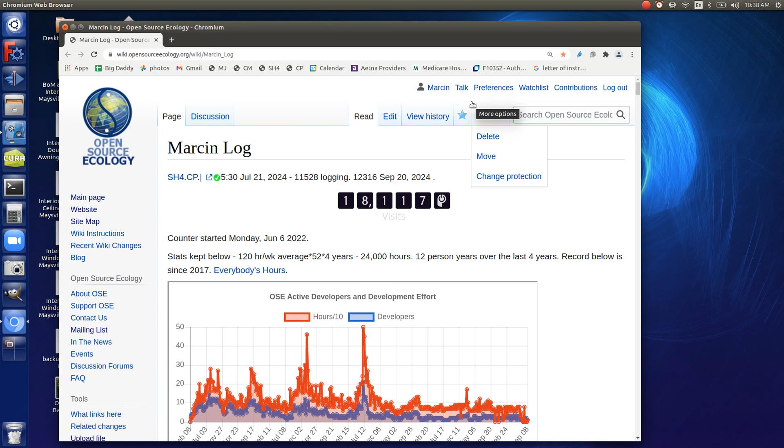That's my mission: to deliver an ability for humans to collaborate on scales unseen before. That's the basic goal, and here, that's a prelude to this.

Would you guys like to take out a computer and take notes in the same document I'm on, or forget it because we're too stressed for time? Okay, but that's definitely what we'll be doing in the future—maybe in future builder crash courses, we'll formalize that.

For example, we could set up a classroom space with desktops already booted up to the page, making it super easy for you to edit—like having an app in front of you. That would make all of this much easier. Right now it takes too much know-how, too much for now.

Let's boot up and review what we did yesterday—basically the numbered, regrouped version of the latest one we have in FreeCAD, just to see what we've gone through.

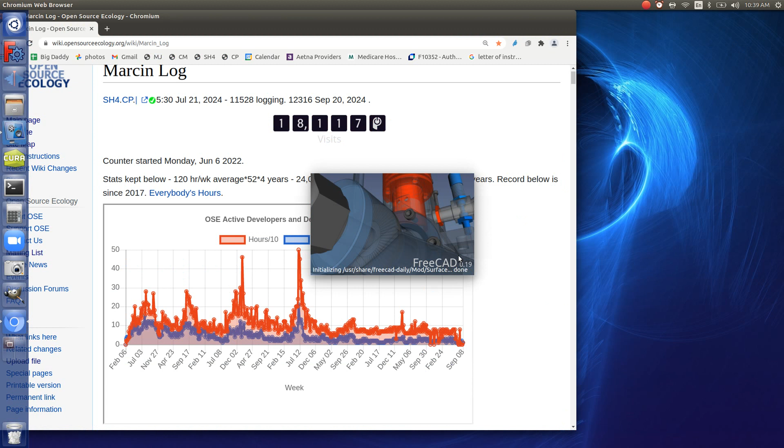The major thing we discovered yesterday was some bowing of the foundation. In retrospect, it's like, duh—one of those don't-be-stupid-101 things.

The 2x8s we're using had posts every 10 to 12 feet between sections, but the span of a 2x8 is about 10 feet, so it's definitely going to sag on you.

Right now, what I did was—I'll show you a picture of what happened, what we did, and what the result was. So in the photos, look at this thing here.

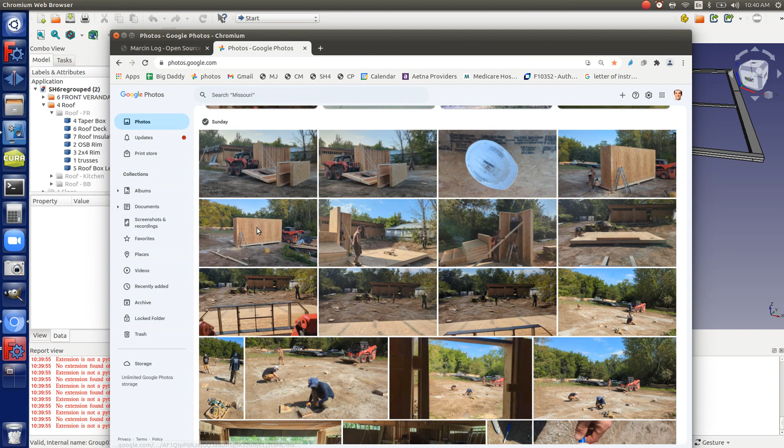Hey, the photos didn't update. Let me see if they can come up in real time. Sometimes Google Photos updates readily, but right now they haven't—as we speak, they should get updated.

What we did here is support it every 10 feet. That's good, because the span in the joist direction is a 10-foot span—actually 10 feet 6 inches. For the 20 feet, that's just right.

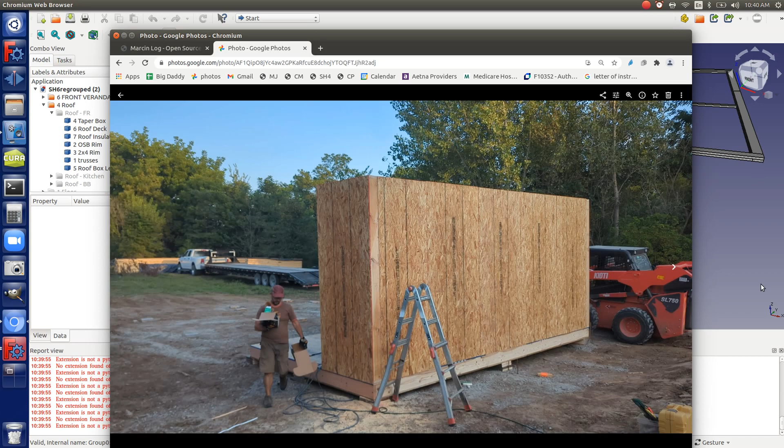So that wall came out good, but we noticed major upheaval when we got to the second wall with the sag. In this wall, as you see the detail right there, we already have that—that's why these walls worked, and nobody picked it up, including me. So these walls were relatively benign to do.

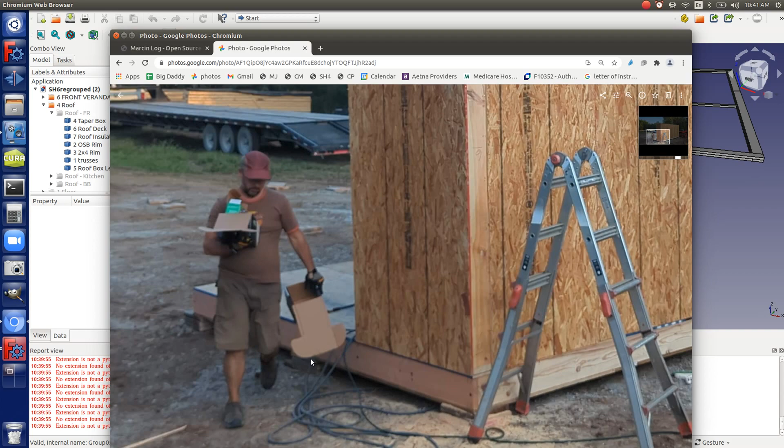But then what happened—let's refresh here. Then, look at this. Man, so this is actually after correction, and what's happening—this thing is in midair.

What happened is we already attached it to the next one, and it was attached on a foundation that was sagging. So it's crazy how it worked out.

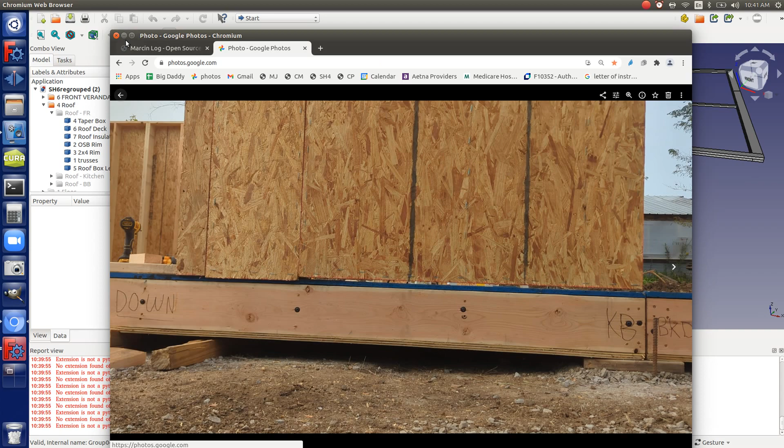Let's actually describe that process. Right here, we're going at it—no support in this 12-foot section, so you have to put a support in the middle. When we were doing this, things started to go awry.

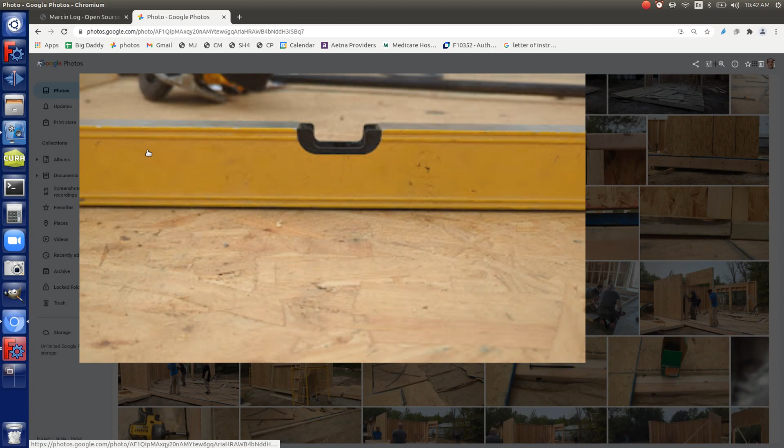Suzanne noticed this when she measured with a long level. This is pretty much after correction—that's not really a space, that's a pretty tight, good gap.

But before that—this is after the correction, I don't have a picture before the correction. But what happened—so we do this. This is how that was the solution.

Cut yourself tapers, like lengthwise, grain-wise—not across the grain, but grain-wise.

Cut yourself some slivers, tapers that were like 2 or 3 inches on one side, tapering down to 1 inch or so less on the other. Whack them in with a hammer, and that's called a wedge. That's leverage, you're creating motion. You're sticking it in over 12 inches to raise it 1 inch, so it's a 12-to-1 advantage with a heavy hammer. That actually is enough to lift it up.

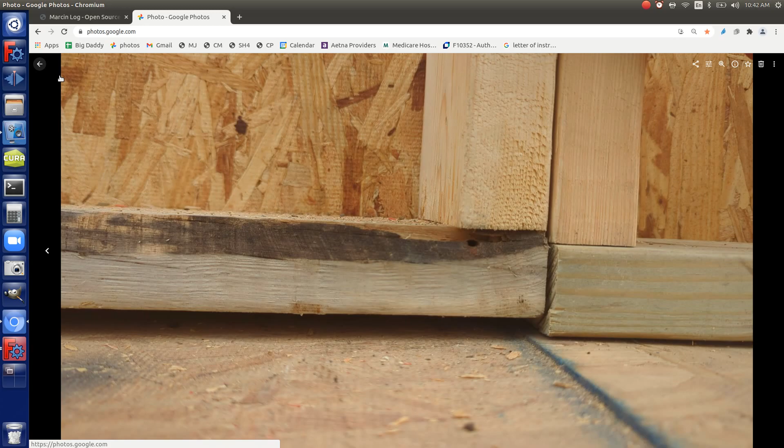So it did lift it up, and those were before some of the before shots, and then afterwards, that's after it got lifted. It turned out we actually screwed those in when the thing was in midair, when it was not altogether.

But after fixing that, before and after. So bam, that's important. We gotta make sure we support them in the middle, and we have to do that for the next section as well, so make sure before we start that we straighten this out.

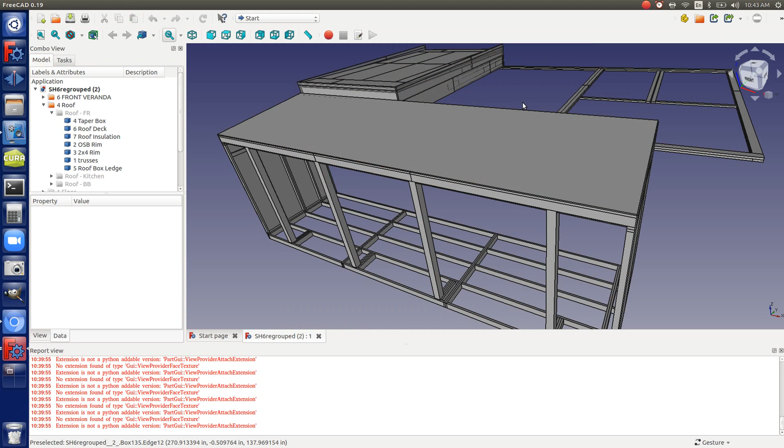Back to the CAD, hide the veranda. So this is once again, you go and we're using all the tools that we can. Yes, there is that, I mean this is what we have when we build this thing.

Yeah, I mean this is pretty much an individual unit, the thing that actually puts it together. So if you look on the other side, because that's a complete break in a house, you gotta make sure you button up the top.

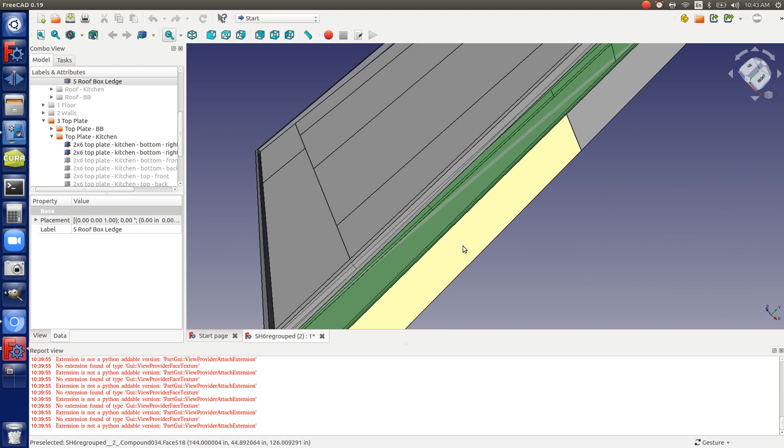So what are you doing? Into the top plate. So this is what we're going to get on, as soon as the second top plate is on, we're going to start doing the trusses.

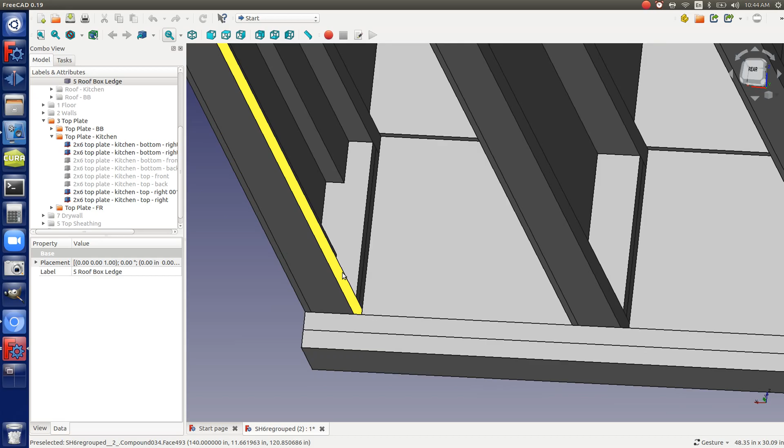So maybe orthographic view, orthographic is easier to handle. So what we'll do is make sure we get solid nails into this 2x4 here, into the top, and then actually all the tops of the trusses.

Are fixed, bonded together with the OSB on top, so that if you screw in, so the edge joists.

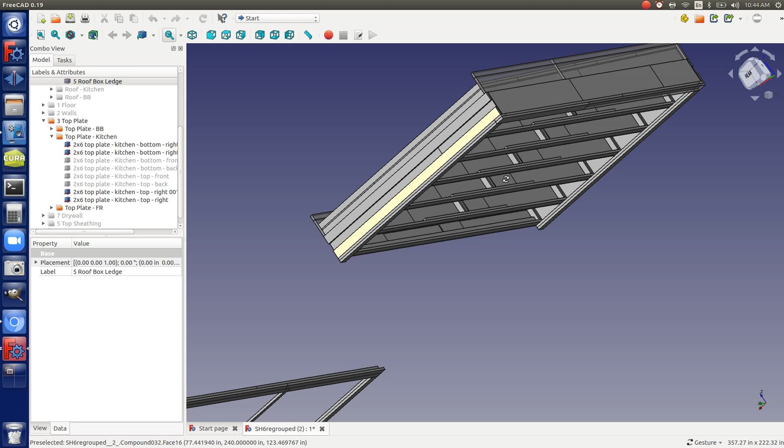These ones, they have two 2x4s reinforced, so you're screwing in through two 2x4s to each other over a structure that's pulling as one. So you've got that force of 1.5 inches of wood plus the OSB, and then another, so you got 4 inches.

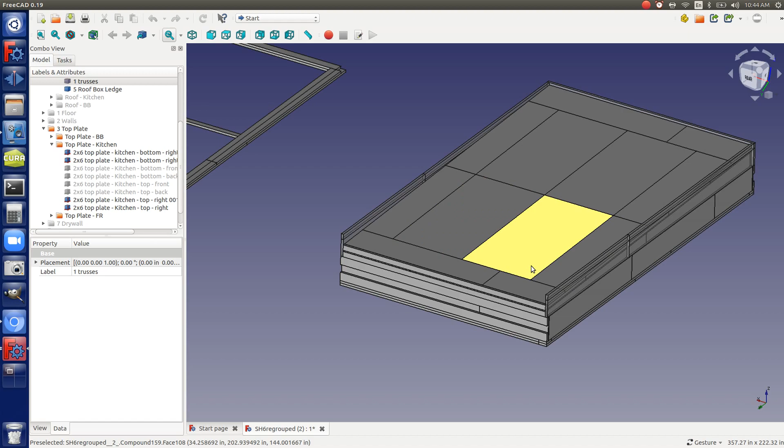You're making a connection to bond the top together, so you close up any of the gaps, like that gap here. Once we do the two trusses together, if there's any gap, we should close it up, because the wood is still flexible.

Now those modules on top, there is a little bit of a gap in there. If you look in there, taking some pictures.

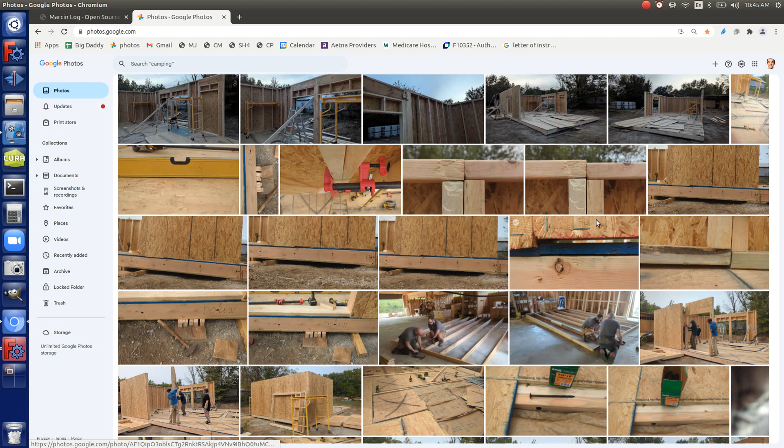Well, right between, this was actually interesting here, because at the very, very top you've got this big header. You're connecting it against that. There's like nothing to screw into there, because this one had a double, so it was kind of hard to bond it together. Let's see, do we have any pictures from the other side?

I guess that's a good example where that top plate comes in on helping join those together, no? Because we can only get so many in there, huh? Yeah, the top plate would be useful, but now we're going to kind of rely more on the trusses now.

There's also more layers that bond it together, and the steel, which is very thin steel. It's called like, what is it, like 20 gauge or something. But steel over a whole length still bonds it together so it can't slide apart, and it's a little more reinforced.

Where's the steel at? So the outside cladding of the entire house is barn metal. Oh okay, and we also use that for the front of the veranda. There was the soft membrane on top of the roof for the main part, but everywhere around we've got structure that's white with some corner trims around that.

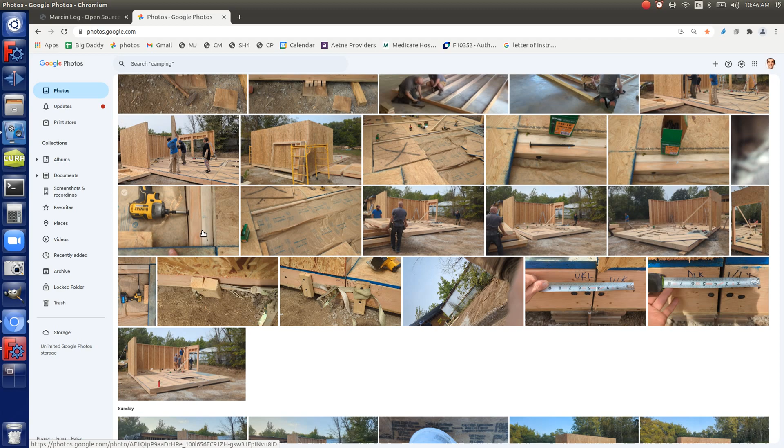Okay, so that's what we experienced in practice. So now as we go forward, just to review, let's go through the procedure again, and also for the rain purposes, we got rained on.

For rain purposes, let's get the first roof, the truss on, so that starts with, you've got the top plate like this, so let's get the double layer on. Once again.

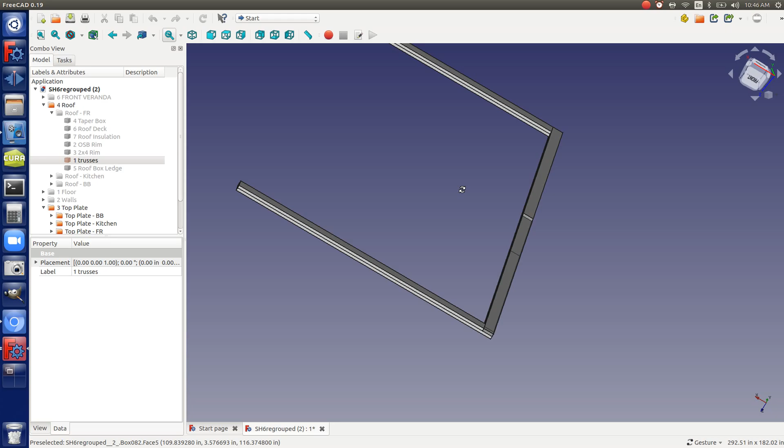What's that? How about one? Trusses, they all come up on, and how do we do them? We probably bring them in, set up two teams on scaffolding, one scaffolding and other scaffolding on each side, just bring them up, put them in place.

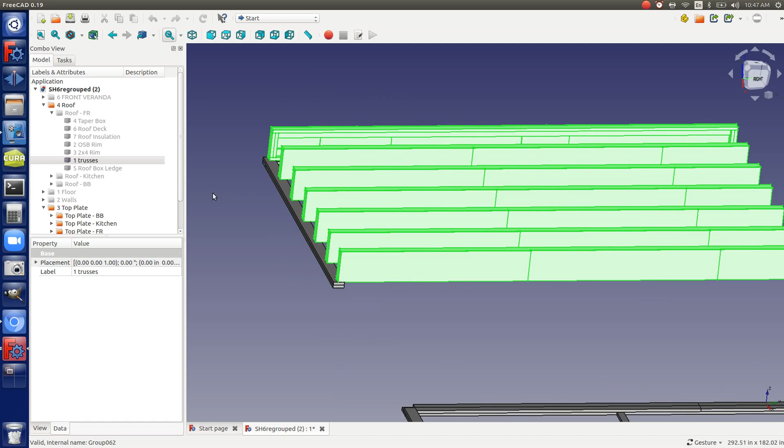And where do we line that one? Just flat against the top plate. Okay, is it? Flat against the outside, the exterior. Yep, okay, it's exactly even with the top plate. Yeah.

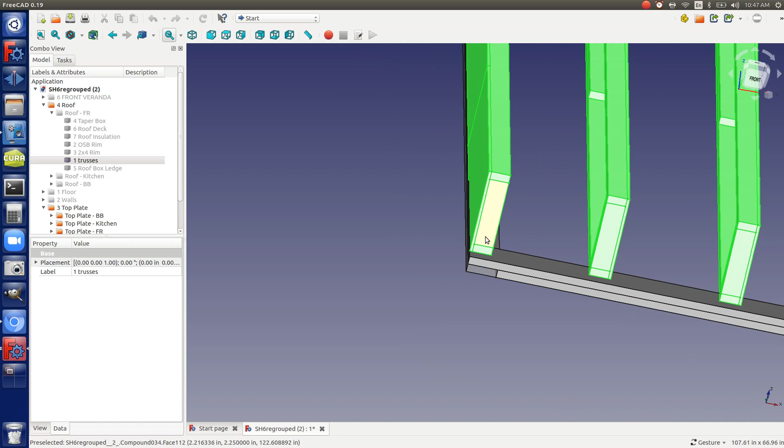Because this, yeah, remember we still have OSB that's going to bond this to the bottom of the house. Remember the top sheathing, remember that?

We still have that layer of sheathing that connects the very tops. It's right against the final trusses, but in the front we have the box. If we go further to OSB rim, there's that.

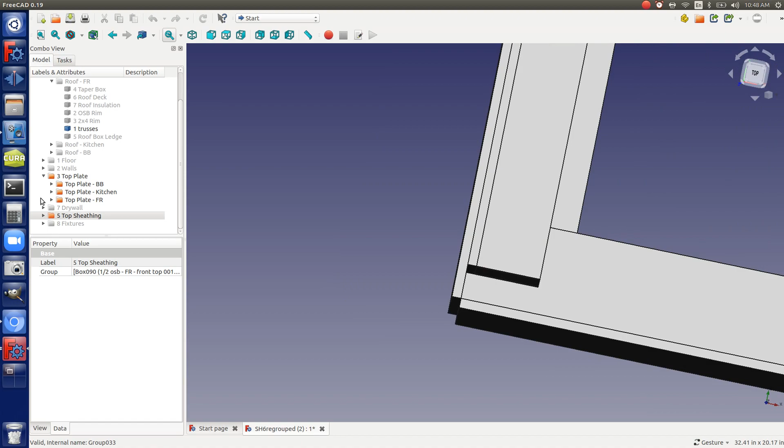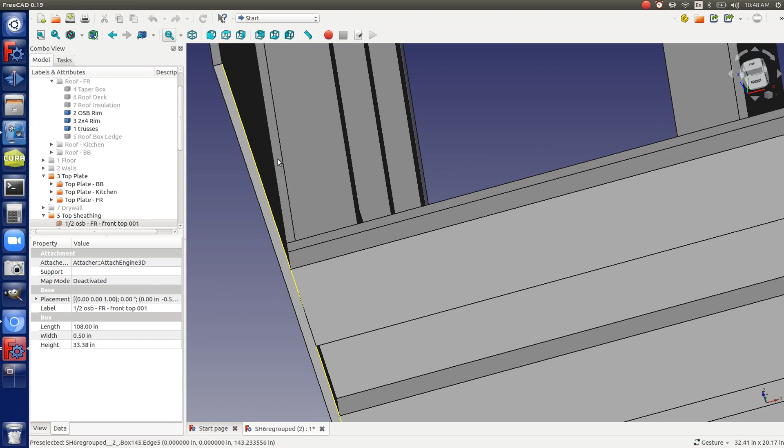3 is 2x4 rim. Those are actually 2x6s for a solid connection to the front. So after the trusses, you've got the sheathing on it and the 2x6s across the whole front and back. The side doesn't, because we've got the surface of the truss to work with, and that truss is already reinforced

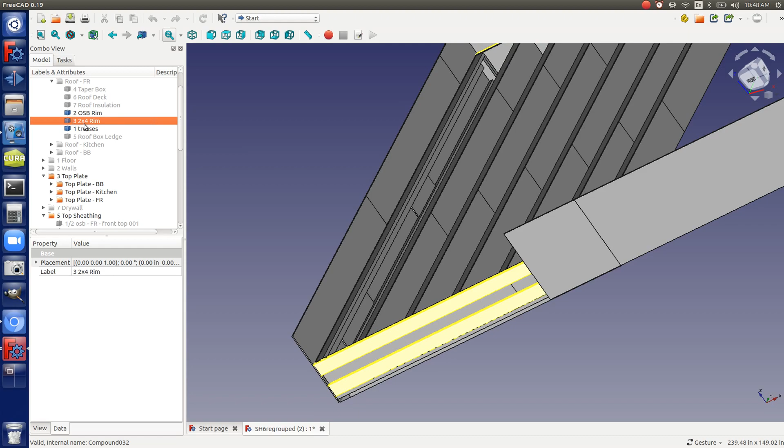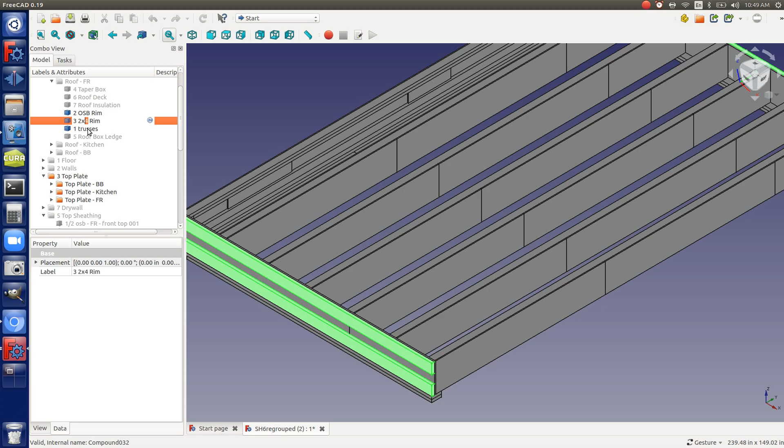with 2x4s, so we can screw into that solidly. OSB rim, 2x4 rim. Okay, let's do that again. So let's hide the sheathing. Trusses. Now let's get that in there. Right, trusses. OSB rim, front and back. You got to bond them together, otherwise they could just fall on you when you're walking up on them. So that's 1 and 3, 2x6 rim, and here I can rename that 2x6 rim. Okay, 2x6 rim. Taper box, so that's what you guys have been working on inside.

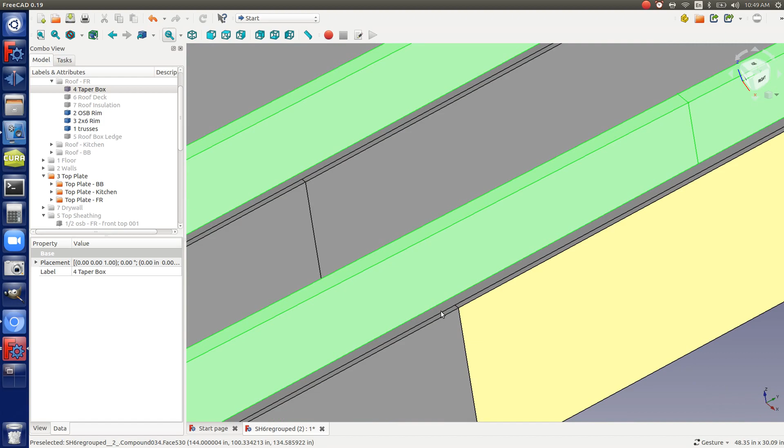Now, how do you put them together? How do you attach that? Toenail - that's pretty much what we got. You can use long screws, but we don't have so many. Just toenail it. From the front, you got to toenail it into the 2x4 right below it. Toenail everywhere, because you've got meat - you've got 2x4s underneath it, so you got plenty of space because it's in the middle of those trusses,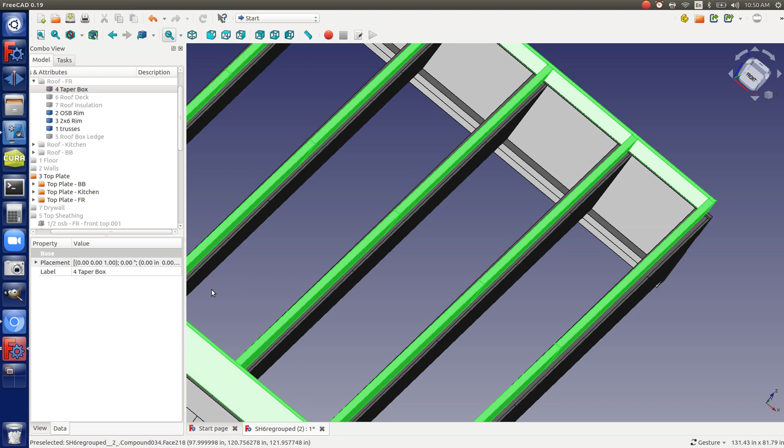so you can get a nail in there readily. How do we get the box up there? We can start it, go from the side and get it with the tractor. We can get the rim over it, and then we have to pull it up there - that would be the process. The tractor can get us quite a bit. With the forks, the top of the bucket is like 10 feet. Right now we're at about 10 feet, so you're marginally making it, and then I won't be able to deposit on top - it kind of has to bend over, and you can just,

run an operation there. We should get out 4 sets of scaffolding so that 4 people are at height. So on that small platform, the 12x20 we've got, that's decked with more scaffolding. So four teams, like 2, or 1 person, whatever, however many people we have.

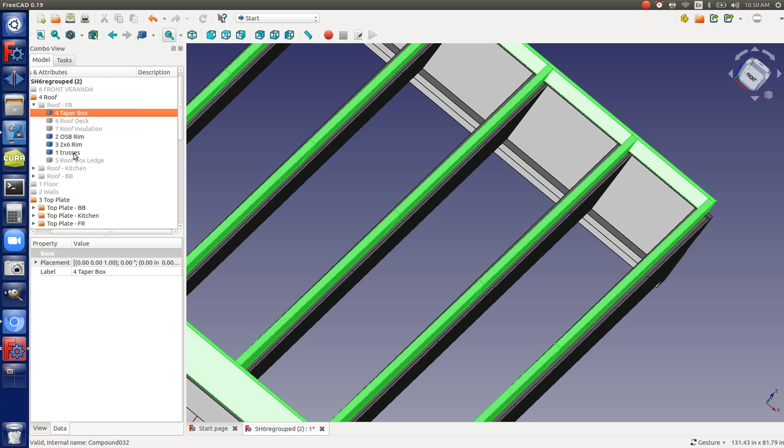Now, roof box ledge - this is the thing that's important for the purposes of water between sections. We discussed that, how we're going to drape a cover over the top. Now, okay, that's a cool question: how do you join these two together? I want to fix those.

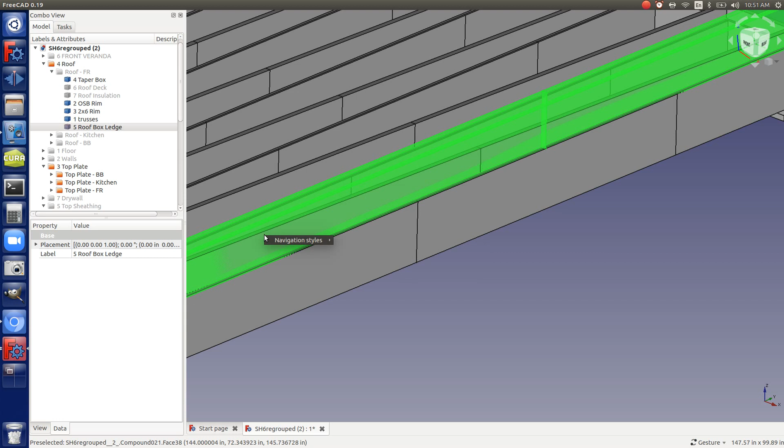View. Workbench, let's go into part design. I'm trying to do the appearance, hide the transparency.

Okay, we've got the box. How do we want to put those together? I was thinking staples - staple them together. Each staple has a 25-pound force holding on each leg. Staples are 1 inch wide, right? Why not? Why don't we do that up there?

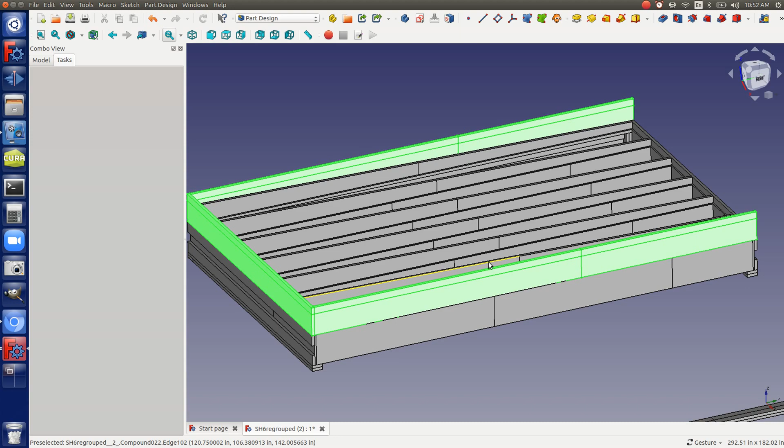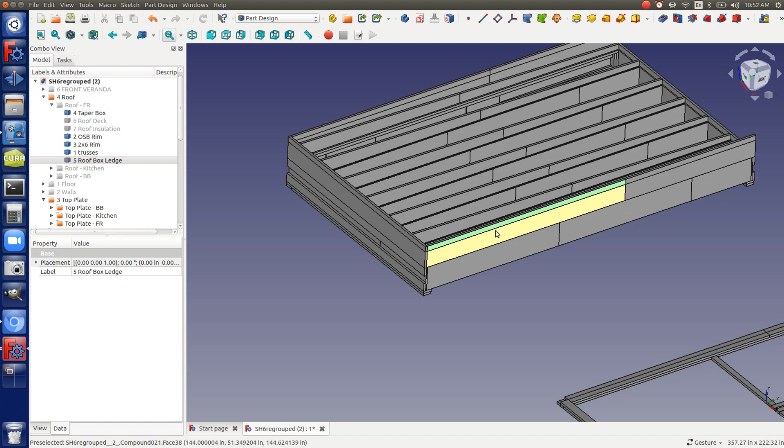So we're at the roof box - the top ones, you take it up there, take the longest 2x that you've got, then take the next one, grab a saw, just cut it off in place if you can. I wouldn't measure it and then go on - measure it, go down, mark, cut, bring it up. I would go put in a longer piece, cut it in place. You got to measure mark already, if you can do that.

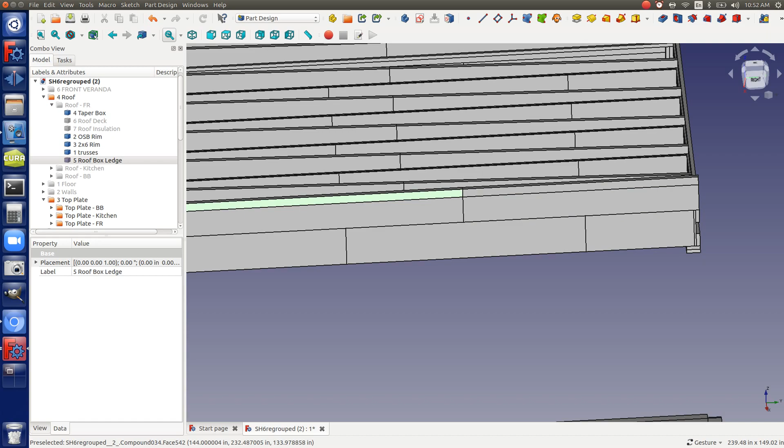That would save you time. Yeah, staples, staples - how many you need? Every 6 inches. If you've got 20 feet, the force holding each one, you can do one side and the other, right? Because it's just a 2x4 on top of a 2x12.

Over 20 feet, you got 40 of them. 40 times 25, that's 1,000 pounds of downward holding force on one side. Two sides, that would be 2,000 pounds of holding force with staples on every 6 inches, right there.

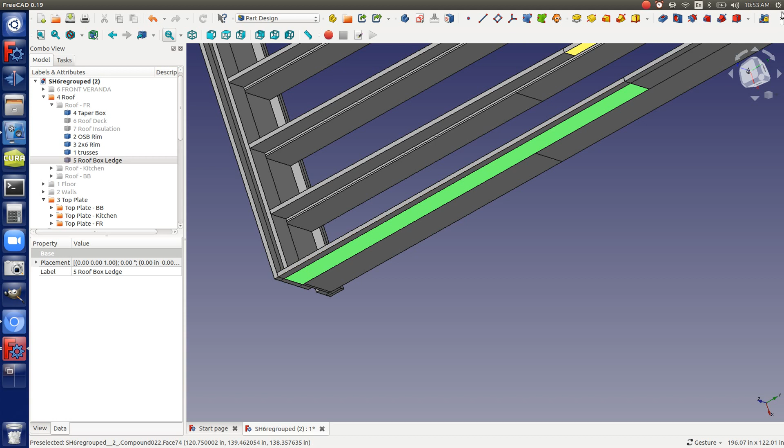I think that's the easiest way. Now we've kind of discovered staples. I've never used staples before, but they're very useful, as you see. So I think staples would be the perfect way to attach those. Otherwise, you can do screw in from the side, but you're gonna be missing because if you got vertical, it's narrow, so you're hitting it and you hardly hit the other one. You're gonna be coming out all the time. So staples could be a good tool.

Use what length? 2 inch if you can. 1.5 inch minimum. Well, no, I'm sorry, you only have 1.5 inch, so you don't want to use 2 inch. So 1.5 inch gets you the... How much penetration do we say we want? We want 1.5 for any fastener as a general rule.

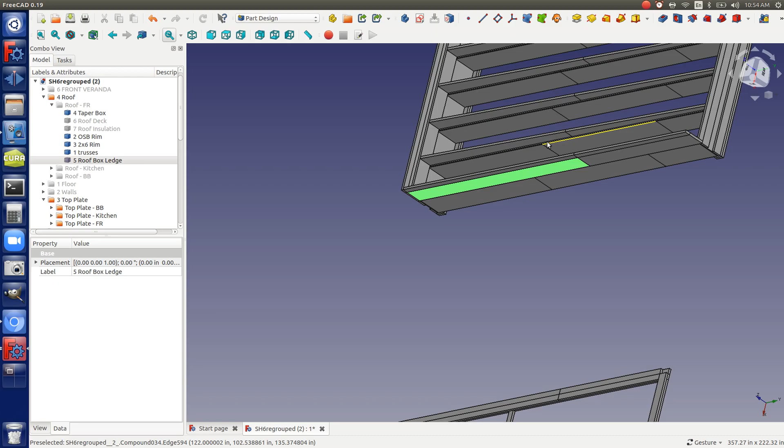Another item is about calculations. How far away from the edge do you want to put fasteners onto anything? The general rule of thumb is either twice the material or twice the fastener. So if you were to do this properly, the staple would be 1 inch from the edge. We have to have 2 inch staples. Twice the thickness of... oh, I'm sorry, I was thinking about OSB. The most strength you could get out of a connection of two 2x4s, 2x materials.

The fasteners ideally want to be 3 inches away from each other, twice the thickness of the material. If you're bonding, we do a lot of the bonding of OSBs together with another scab. Calculation question based on that basic rule: how big must the scab be in order to get a solid connection to that of the two pieces, based on this rule that the fastener should be twice the thickness of the material? What's the minimum scab that you can put on a crack between two pieces of OSB?

How thick is the OSB? Half inch. And the fasteners, well, whatever fasteners we had, let's assume we had staples of any width or screws, which you can space at any distance. Well, yeah, so you want to nail in 1 inch from the edge, right? So the absolute minimum is 2 inches for that scab. Well, you're gonna hit the edge, you're gonna miss the edge. So make it twice as big. So the absolute minimum for a scab between two pieces of OSB is 4 inches.

That's the answer, so if you're doing that just for providing the strength of the material. If there's forces on it, that's different. For example, when we're joining the trusses, which we did for the 32-foot span, you don't put a 2 inch scab between the two, you don't overlap them 2 inches. No, that's got a huge force of up to 3,200 pounds, well, 1,600 pounds on each shear thing there. So no, that does not work. I'm saying just when you make a break somewhere and there's no other forces, then you follow that rule. Otherwise, you have to...

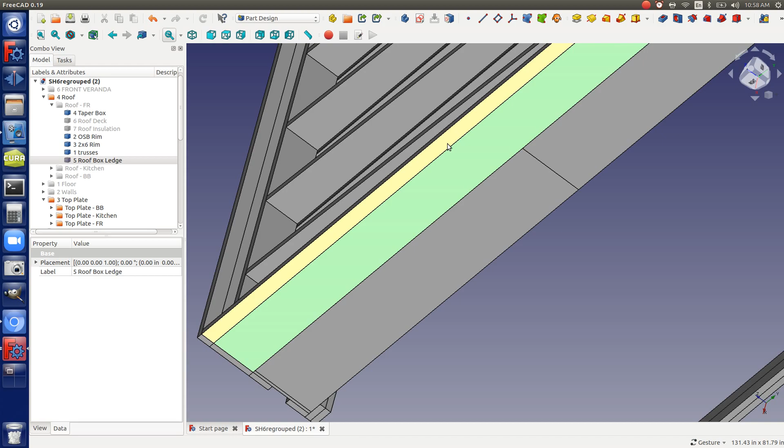It's related to calculations in that we have to get that kind of savvy to understand the details, because that helps us build faster, better, stronger, cheaper, and all that.

For example, going back to the trusses, I'll brag on myself again regarding the fact that we eliminated half of the needed trusses. If you went to an engineer, he'll make you put twice as many trusses because they did not use the design that we used. It matters. That's thousands of dollars off the cost of that structure.

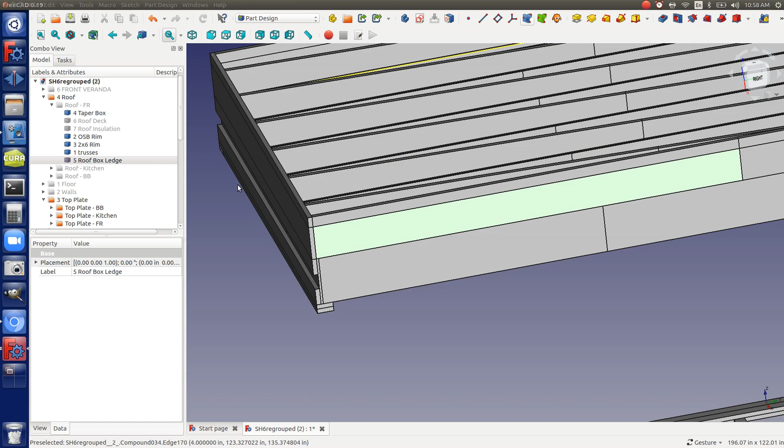So we got up to this thing. We're discussing how do you fasten it. Use staples. Roof deck, no mystery there.

Just make sure, how do you align these things? You got to make sure if you have that roof box in, you can only start at a corner like such as this or whichever, this or that corner. You will end up cutting off the last one, but the first one can go in, bam.

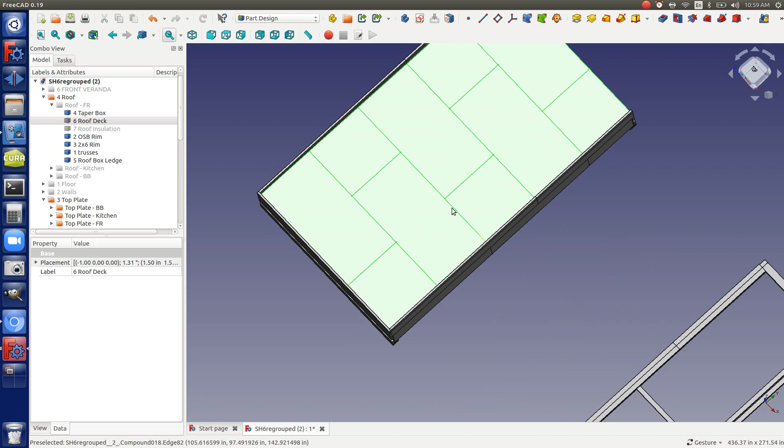Now, if it doesn't end up on a truss, or rather the taper underneath it, not the trusses, now you've got not 4 inches, now you have 1.5 inches. So that may veer off.

What happens when it does? Move it. These trusses are completely flexible right now. You'll move them 1 foot to one way or the other if you want to. When they're supported just on the edges, the middle will bend with some force, like 1 foot, and it will still hold.

I'm exaggerating, but an inch you can absolutely move that an inch or two easily in the middle. At the end, you're going to get tighter and tighter. But something like a quarter inch, if you're off, move it, it'll probably move a quarter inch. If not, how do you do it with leverage though? So you have nothing to hold on to.

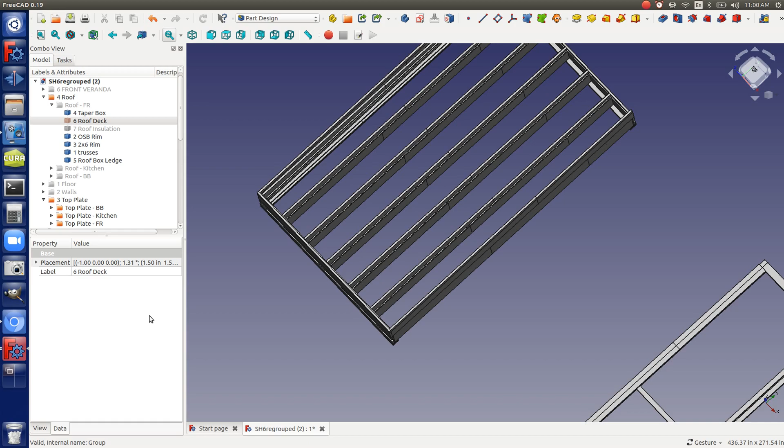So what you do is, let me show it on a diagram, because this is going to be the killer in terms of how fast and good we're going to be able to get the roof on. Let's go to the written doc that we do, just to show this clearly, so it's completely under your will where that OSB is and how you can move that OSB to fit the tapers at the end of the day.

Okay, let's go to the Builder Crash Course.

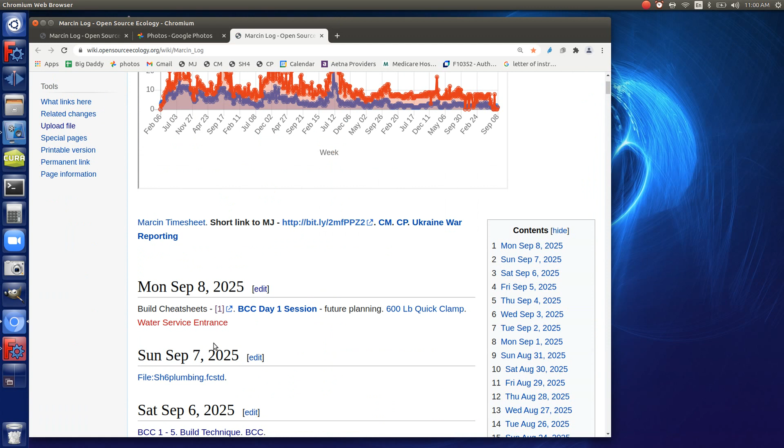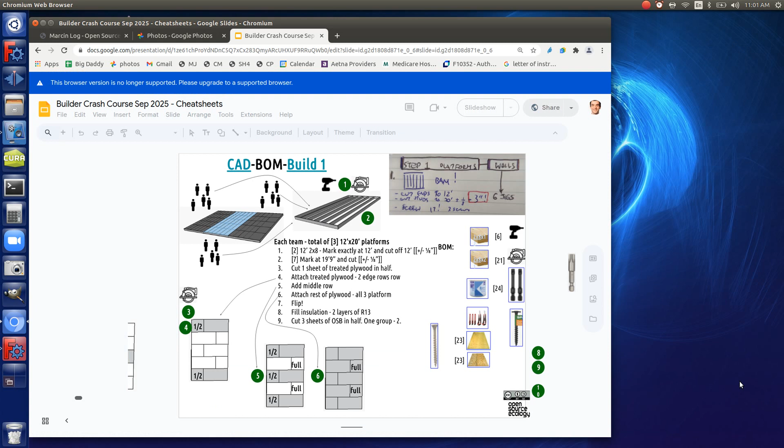We got the work doc is the thing I keep going into. No, not this, sorry. We're in under Builder Crash Course. We've got the September 25, I'm doing the history, that's the first one. But if you go to plain Builder Crash Course, that's what you get. But then I've got the September 2025, and it's under the cheat sheets here, because what we're doing now effectively are cheat sheets. We don't have full instructions, exploded part diagrams and all these assets, animations, exploded part animations, and a lot of that stuff is missing, and we generate as we go along.

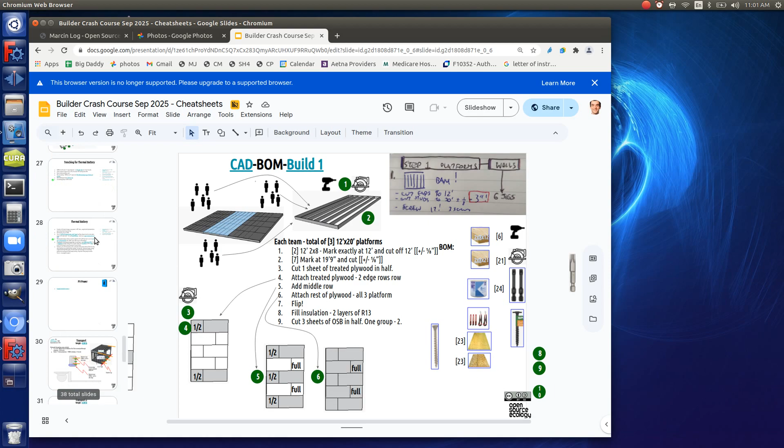So let's show that real quick, how we put it together. Duplicate the slide. Let's say move like OSB roof sheathing technique. Okay, so we have a joist.

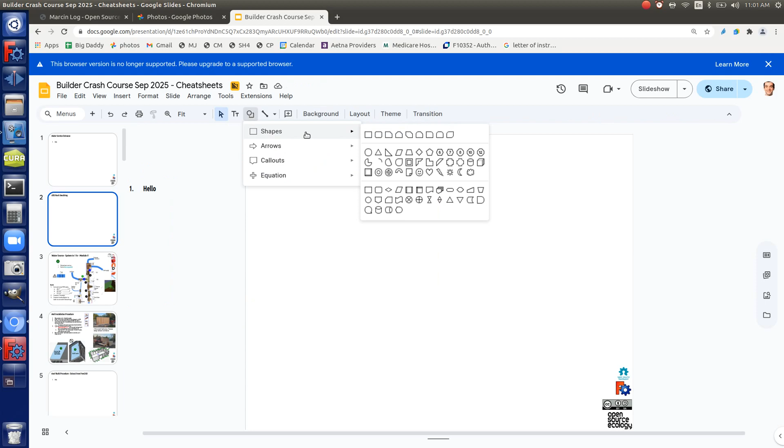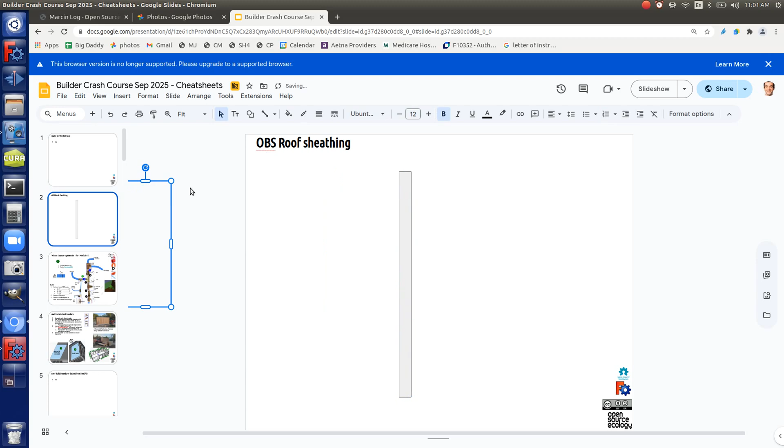If somebody had a computer, they could draw this while I was talking already. So you have this taper, right? That's the taper to which you're attaching, looking from above.

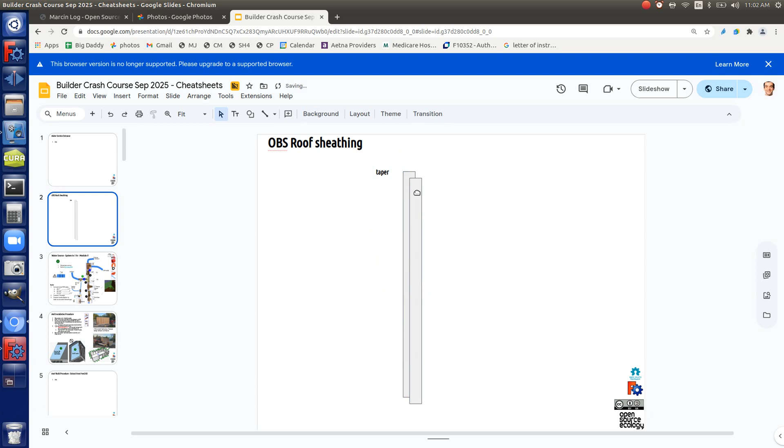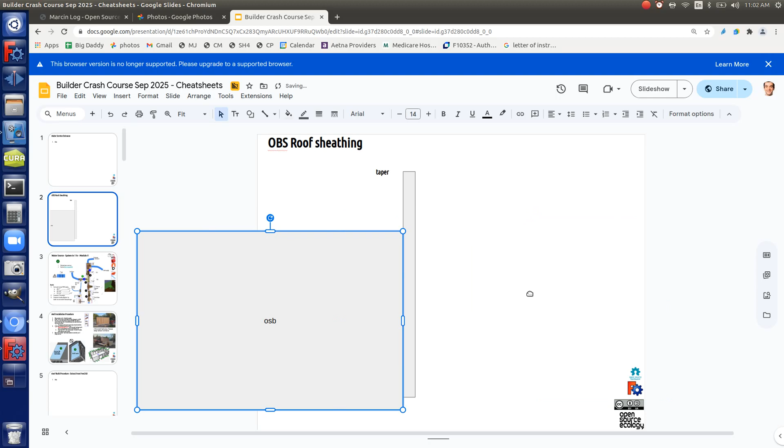Say the OSB, that's your big sheet, call it the OSB. Say you ended up just like that, and the next OSB barely caught it. That's not good enough. You want to move it to the middle. What do you do?

Nothing's attached here. Or say this one was attached. Let's walk through various case scenarios of how you move things next to each other. What you can definitely do is put in a little block, screw it down with heavy black screws. Put in a 2x4, or better a 2x6, because you can easily put 4 screws into a 2x6. Put it right there.

Okay, I put a block up there, it's in 3D. Can you do anything with this? If you had to move in, say you do a block that's hanging, it would be more like this. Oh, here you go, you screwed in a 2x6. If that's the case, easy.

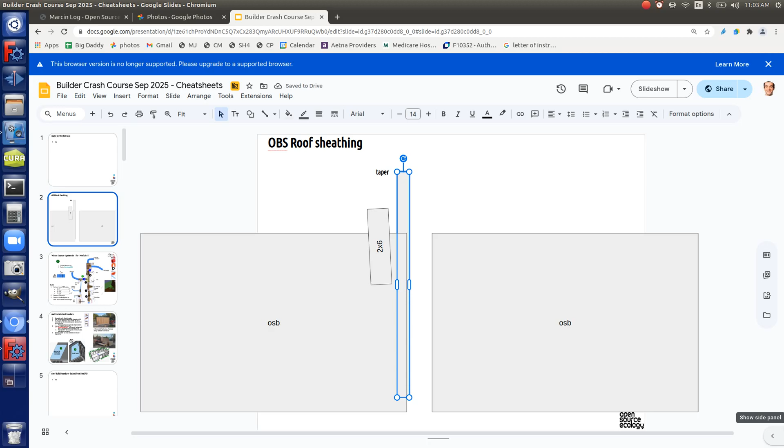Throw in a pry bar there, pry it out, you're gonna get it to the edge. That's the technique, get it? And then, okay, but say you had this. Well, that block would only push it further. So what can you do there?

You can put a clamp on that, or you can put a block like this, and another one. Screw this one in like this, and then screw this one in like that, and now you have a prying surface. You can throw your pry bar in there and pry it over.

So you got to think like this. Don't say, 'Oh it's out of the way, I don't know how to move it,' because you can use a hammer. Perhaps the hammer is enough. So try that first. If the hammer moves it enough, great.

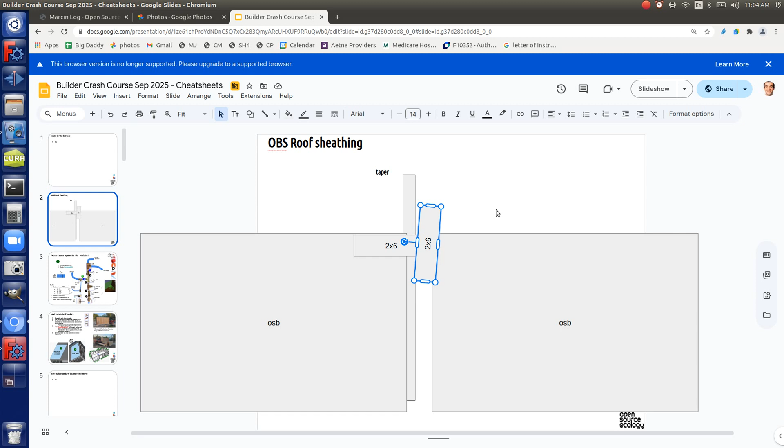I remember how we did the other one, yeah, and we got that done. So if we get the spacing right on the trusses and the tapered sections, get everything in the middle, shouldn't have to move it too much I wouldn't think. Yeah, we can pry it over, hammer it over, use a clamp.

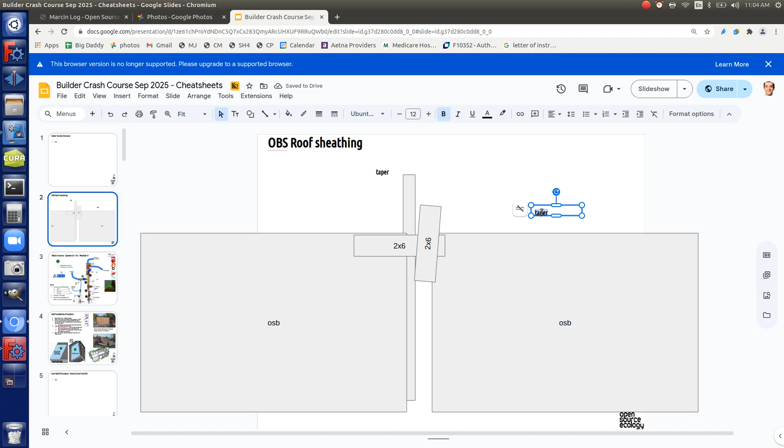Okay, so say you try all those options and it didn't work. What's the last resort? What if it didn't fit, whatever we tried to do, we removed the 2x6s, we couldn't do it, this is what we could get. What's the last resort? Cut it. You can't do anything but cut it. There's no option there.

Sometimes you also don't want to take measurements if you moved it out where it's definitely not on 24-inch centers anymore, because it could be off 24 centers and not working out. If you're moving it and it's definitely gonna mess up everything else, then maybe consider whether you need to do that and just cut it, because otherwise you messed up everything for downstream.

So you have to think not only about the present situation and the downstream situation, but ideally this thing goes forward well. This is where the quality control, the build quality of what we build on the ground, matters — if we got everything straight and nice, the faster it goes. That's the difference between a professional cranking out top 1% pay versus a novice who very easily takes 4 times as much time, or up to 8 times more, than a pro. Those are real figures.

We've seen that kind of stuff here, where you can only do so much because you're working against compounded errors, poor measurements from before, or lack of awareness of what you're doing or the steps ahead. You might have fixed it right now, but then ahead you've buried yourself into a hole because it created a problem downstream. You have to keep those 3 levels in mind at the same time.

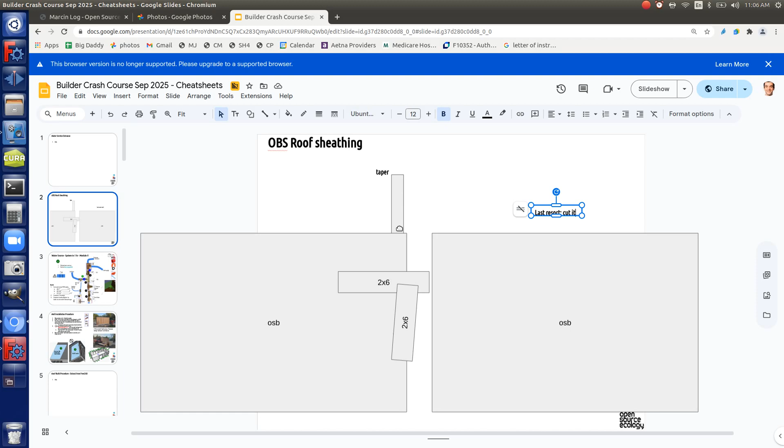Okay, so that's the sheathing layer, and at that point we're pretty much ready for the material on top to make that waterproof, which would have saved a day like today where we had to cover it. Okay, back to the CAD.

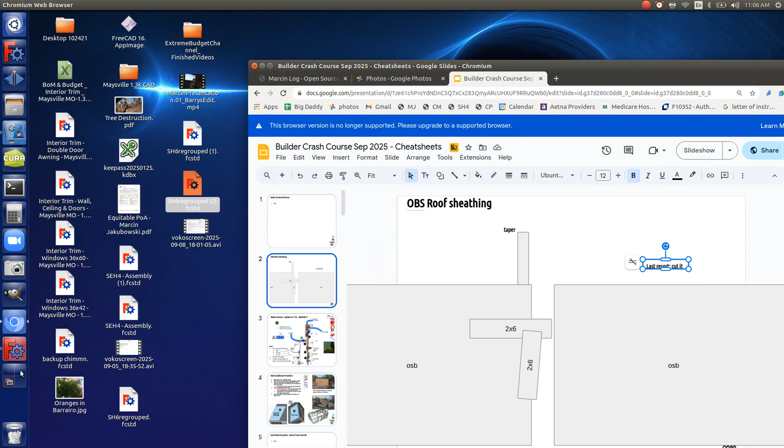Step 7, roof insulation, that goes on. Oh yeah, forgot about the roof insulation there, and the roof deck. From this point we call that the definition of done for this section, but I'd say before we even do the roof insulation, do the roof deck — that gets you the ability to protect this from rain easily. We don't want it raining on this more.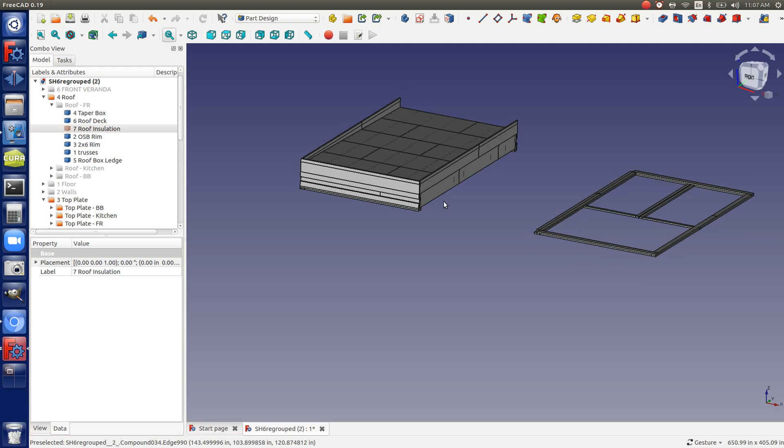As soon as you've got the deck up there, you're ready to start attaching the next truss, because you're going to bolt the next truss to this. That assumes we already have those walls. As soon as you're at this stage of deck, start working on the next section so we can divide up.

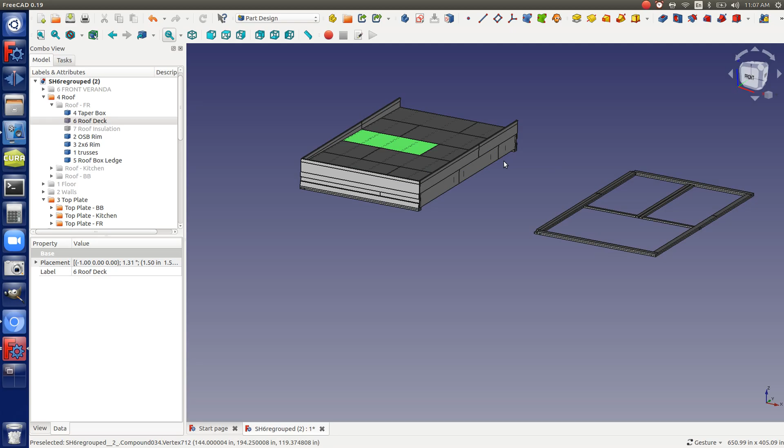So, black bolts, or how did we join it? Yes, for that stuff, do the black bolts, the 6 inchers or 5 inchers. You need how much? You've got 1.5 plus half of the OSB, so that's 2 inches on each side, minimum 4-inch screws. Do not use the 3 inches, that's going to have minimal holding. Just do 5 or 6 inch. I don't think we have any 4s. We've got a lot of the 5-inch ones, so we can use those. Do that, and there we go.

Now the back, you see it already, the rain goes to the back. We're good. And then that top sheathing was already there. Well, no, it wasn't already there. The top sheathing goes on when we have done this, right? So we've gotten all this stuff up. As soon as the box is up, you can divide into the roof deck and the side sheathing. The box forks into roof deck and sheathing on the upper side.

Okay, so we can do those things. All right, so that's what we got. Any questions, or what else do we want to go over today? I mean, let's reinforce, let's put some spacers underneath for the sagging issue.

That's a thing, I think. So do we need to check the middle one for level? Yeah, we do. Okay, check the middle one, it should be pretty good right now. Let's check that we actually have a flat surface there. I think we have to unscrew one wall section where I think that's vertical. No, I fixed that one. There's one in the back that we want to check for alignment, because that's after the correction, so the last module on one side and the other. Let's check that, okay, and there we go.

And then level the third floor module, make sure it's flat. Put some spacers before we're going on there, and that's the structural part.

We can probably get the second section on. Well, let's see how far we get. We don't have bodies, so let's see what we can do here for the section, just to cover one fully. At which point you're ready to do the insulation from the bottom. It's almost getting ready for the thermal aspects and total finishing.

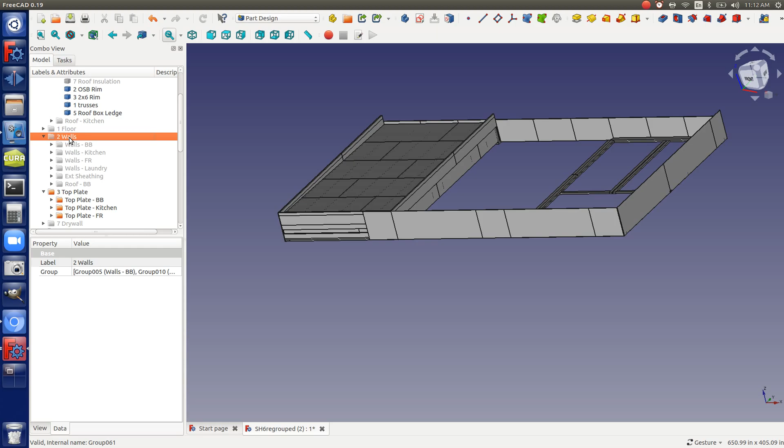Also, how are you waterproofing the sections between the roof? Yeah, we talked about that a little bit. You span it - I would do the same material, the fiber reinforced polyethylene, the 30 mil stuff. So if we got the walls, you got the roof - this is what's exposed at the end of the day. You got the insulation and everything up there.

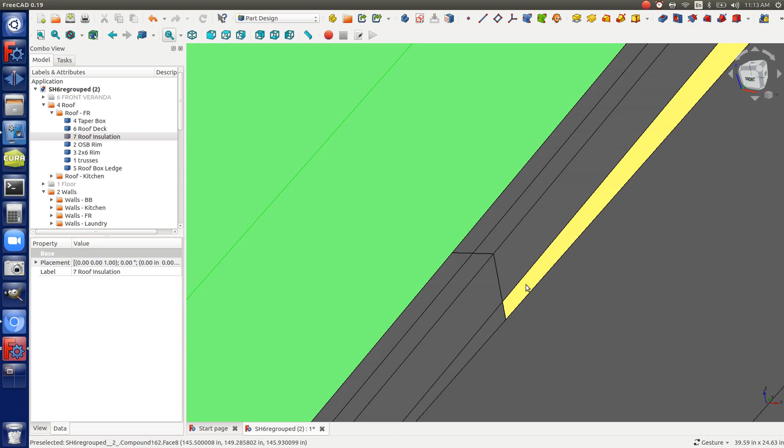You need to span that crack there - that's a rain crack, right? So you need to close that up, and run the fiber reinforced polyethylene up these joists, because that's a crack that goes into your house. So you got to run it up and over. But since we're shipping in 3 parts, we're going to run it up to the edge, and if we have enough material, we go all the way to the top, into the crack.

I'm not sure we're going to have enough material, because we designed this with extra material for one piece - we didn't consider the moving in one. When we started this, we were going to keep the house here as a demo house, and that changed. So what we'll do is run the membrane up to address this leak here, but then you've got everything at the top - that's a leak point.

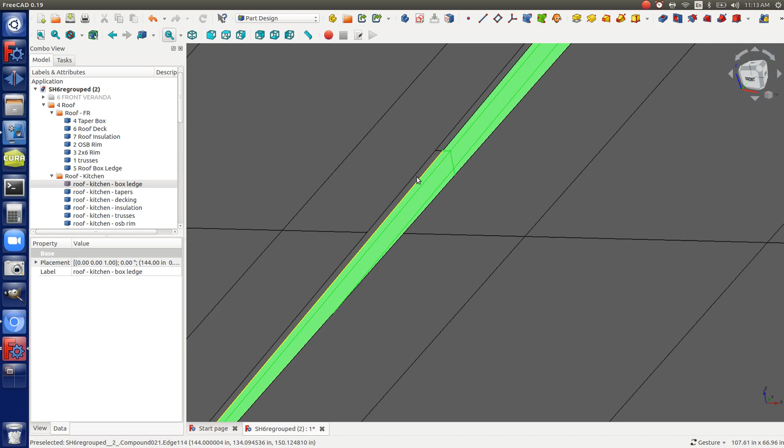So you got to cover this whole top, overlapping the membrane that goes up to the edge here - you're capping it, like a cap with the same FRP, fiber reinforced polyethylene material. Then you got to protect the FRP from UV, so you trim it up and put treated wood on top of that, like a box with those 3 sides, protecting it completely from UV. Your entire structure is a 100-year roof - you've just done a 100-year roof.

This is awesome. I don't know why everybody doesn't do gravel protected roofs. Well, we know the obvious answer - everyone has a regular house. You can't put gravel on top of a sloped roof.

Flat roofs are in code, so that's already gravel - it's cover, exactly what they do. It's called a protected membrane, protected membrane technology - that's all it is. It's just things like gravel, and they have gravel specs for stuff that goes on a roof so it can't be blown off by the wind, can't be dusty, can't be too heavy or sharp that you puncture the membrane underneath. Pea gravel works great for that. We can get pea gravel at $50 a ton from the quarry by Kansas City - we'll take our dump trailer once that comes. So the gravel is basically to protect it from elements.

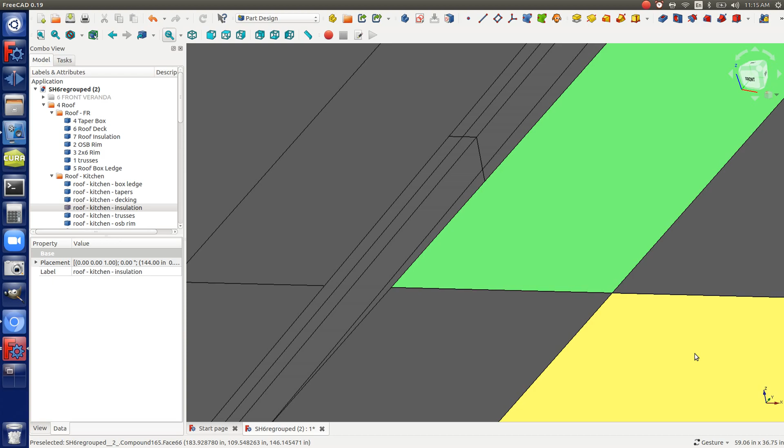UV light is probably the most destructive element outside there. UV will destroy just about anything except ceramics and steels. Any biomass, any organic molecules - UV is in a wavelength range that breaks up those molecules. I've seen that on my roof, even with the chimneys and some plastic I put over them - the sun breaks that stuff down over time. Yeah, UV. I've got metal buckets in there now.

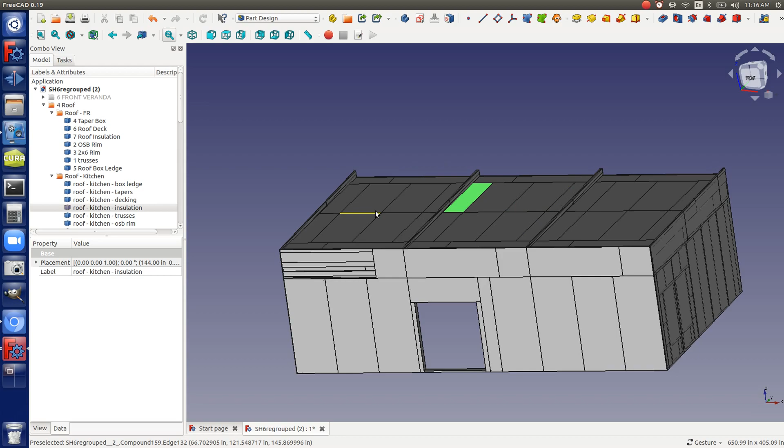So we're looking at 3 sheets of polyethylene for the roof, and they're going to overlap on the seams, so it'll be waterproof but can still come apart for shipping. That's easy enough - each sheet goes there and up to the edge of the tapers.

We've got to make sure we do that carefully, that we have enough, because we have basically a long sheet and it has probably 2 or 3 feet extra on each side, so we've got to cut it right into 3 sections. We can't make too many errors there, so we've got to measure it carefully.

It's just going to overlap on the seams. So you go up the seams, and then for the meantime, just put a piece of trim or a board up there to close that seam, not over the seam, if you want to.

So there's 2 pieces of roofing membrane per section. You've got one that spans the whole thing, and a second one that caps over to the adjacent side - a narrow strip that you're using to cap that. Now, how are you going to connect it at the sides?

I think the proper thing is you use roof mastic, this water protection mastic, this gooey stuff. But if you're covering that with trim, you're talking about screw holes or nail holes. You have to put water stop caulking or this roof mastic substance above that - wherever there's a puncture, you lay that bead of caulk above it, so water isn't getting into that.